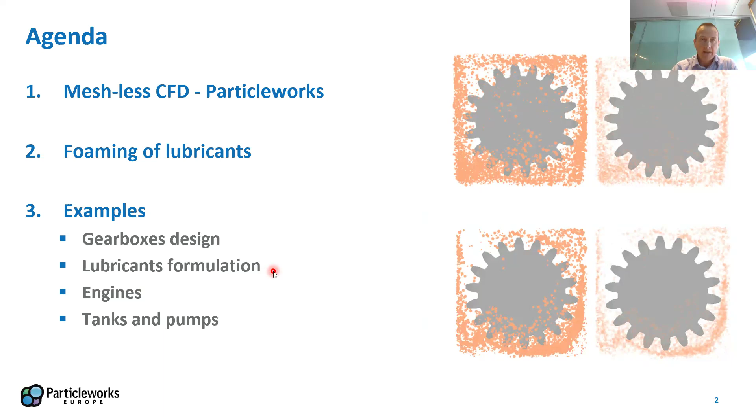Let's start from an introduction to Particleworks and meshless CFD. Particleworks is a meshless Navier-Stokes solver. Meshless in this case means that the fluid is discretized by particles instead of computational cells. So instead of using the classical grid that you probably know from finite volume CFD, we use particles, and each particle represents a certain volume of fluid.

The software can simulate single phase and multi-phase flow. Single phase means, for example, that we can simulate only the oil or lubricant or liquid phase in a gearbox, in a transmission system, in an electric motor, or for piston cooling, for example, you see here. We can also add the effect of air or gas flow on the liquid phase by multi-phase simulation.

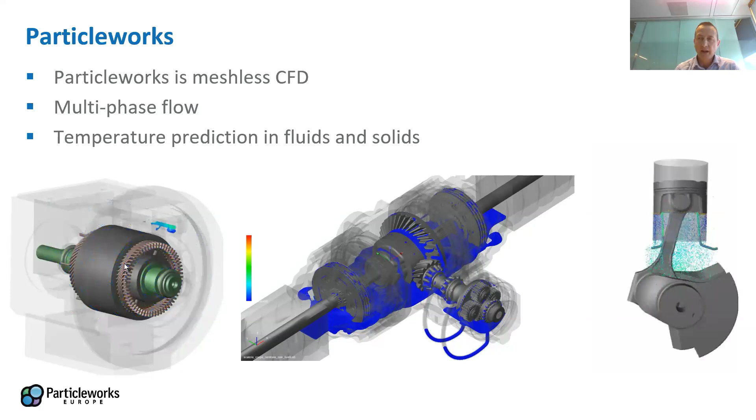So the software can simulate multi-phase, and it can also calculate temperature, both in fluids, so oil and gas, but also in solid bodies. For example, we can run a conjugate heat transfer simulation of the piston or of the windings and rotor of an electric motor. So Particleworks is not only meshless CFD, but it's also heat conduction and multi-phase flow.

Here you see an example of temperature prediction in the lubricant of a gearbox. You see the temperature evolving, so we can apply power sources associated to the gears, to the meshing of the gears, to the bearings. We can include the heating effect due to shear heating, and this produces heating of the oil, of the lubricant.

But also we can calculate in the same simulation with the same model the temperature of all the components of the gearbox, including the heat transfer between the solid bodies and the oil or gas phase, and the heat dissipation to the external environment on the external surfaces of the housing.

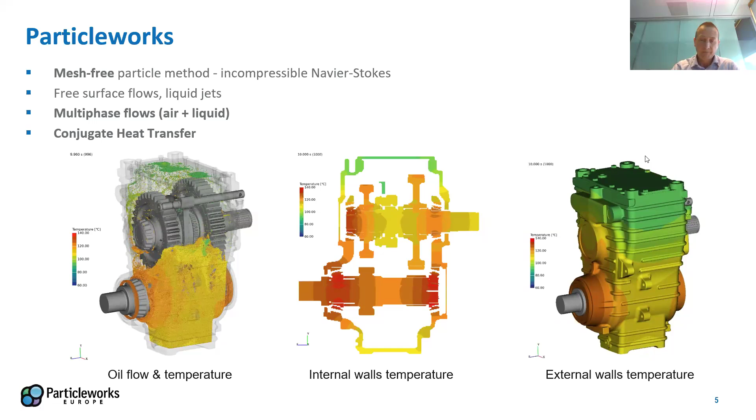The method on which Particleworks is based is called moving particle simulation. You are probably aware that there are different methods available. One of them is SPH. MPS, moving particle simulation, is quite similar to SPH, but not exactly the same for a number of mathematical reasons. The moving particle simulation was originally proposed by Professor Koshizuka from the University of Tokyo.

Together with other people from the University of Tokyo in Japan, Professor Koshizuka co-founded, almost 30 years ago, Prometech Software. Prometech Software is the company that develops the software Particleworks, and as you probably know, Particleworks Europe is the European office of Prometech.

Here is a parallel between the Eulerian approach that is typically applied by the finite volume method, so classical CFD, standard CFD based on an Eulerian approach. Let's say the drawback of the Eulerian approach, the mesh-based approach, is that first of all you have to generate the mesh, and this could be time-consuming and demanding depending on the geometrical complexity of the system. It becomes quite demanding and quite complex when you have moving parts.

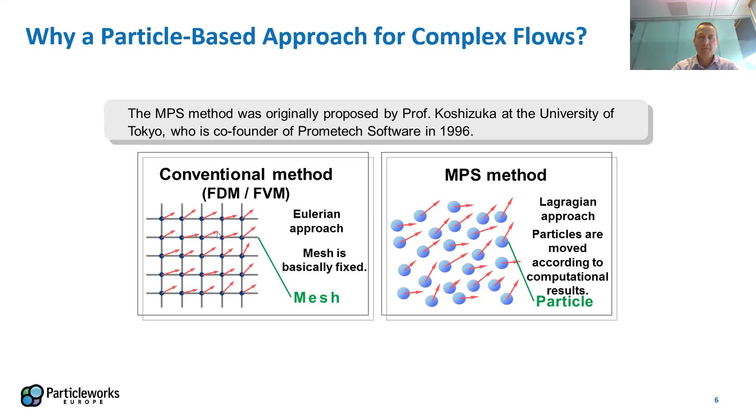So that's why meshless methods started to be developed by Professor Koshizuka and the University of Tokyo to try to simplify and to speed up the simulation process for powertrain applications. To show you a comparison and where the benefit is of using Particleworks and meshless CFD, here is a parallel between finite volume CFD and moving particle simulation. The two first steps of the simulation process, so the CAD cleanup, the fluid volume extraction, and the meshing part, are not needed for the moving particle simulation method in Particleworks.

What Particleworks does is to read the CAD, the 3D CAD, the solid bodies of the CAD, so the gears, the pistons, the casing, or the other components. So the CAD as is, you need to set up the fluid properties and boundary conditions, numerical settings, and then you start the simulation. So one big benefit is that you don't need to carry out these two steps. So this is a huge amount of time and man hours saved at the beginning of the process.

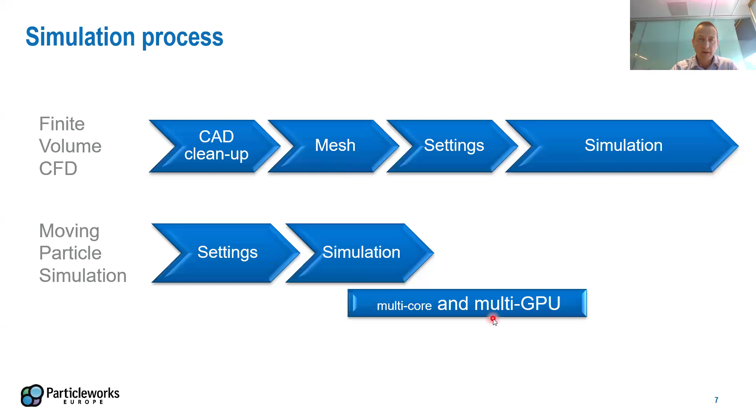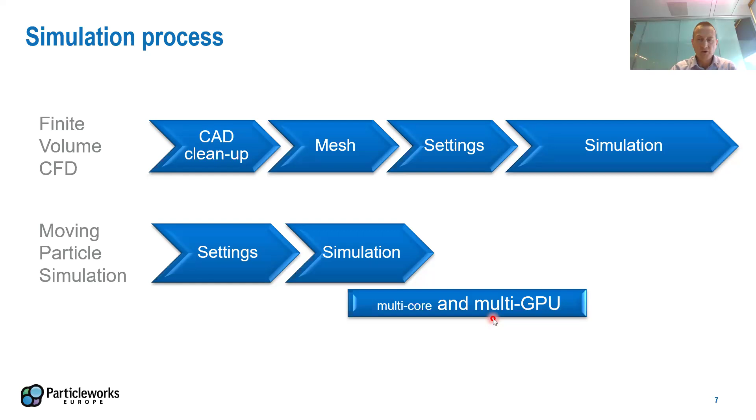And the second benefit is related to the GPU and multi-GPU capabilities of Particleworks. Particleworks was originally conceived to run on GPUs, and this makes the simulation extremely fast and also affordable, even without huge HPC clusters.

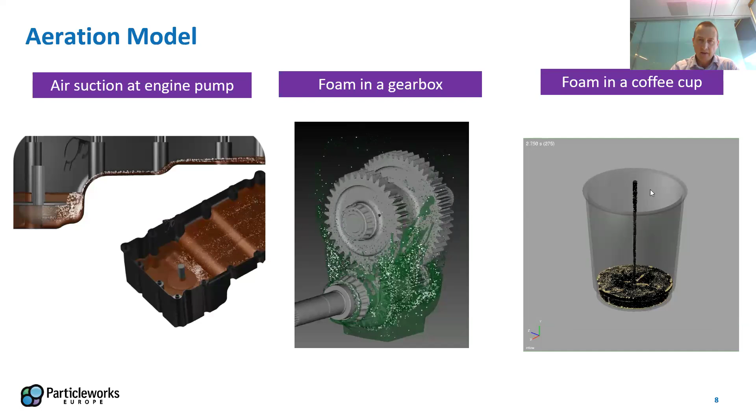So after this brief introduction about Particleworks and meshless CFD, I will give an introduction about foaming in lubrication, the drawbacks, the problems generated by foam, and then we will go into the examples and some industrial use cases, or at least some use cases that we built using demo models. So where does foam come from? Foam is actually already there. Air is already in every kind of liquid, water, lubricants, any kind of material contains air. Some estimates are that lubricants naturally contain from 6 to 12% air in volume. This is obviously not visible; depending on pressure and temperature, the rate could change.

And the problems start when the air is either released or when more air is entrained into the lubricant. Let's say that air can come out of solution, so it's originally dissolved, and it comes out due to pressure drops at high speed. This is basically phenomena associated to cavitation, high speed, and high pressure drops that might happen at pumps, flow restrictions, bearings in general when you have rotating parts at high speed. We will not talk about this kind of phenomena.

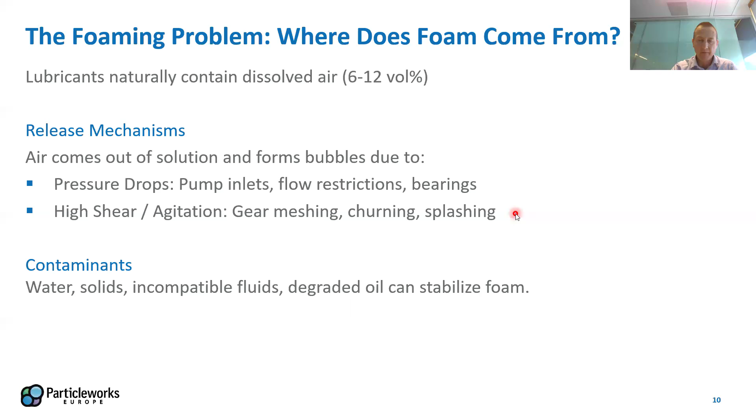To give you an idea of the costs of foaming, we mention here some of the problems related to the foaming effects. Oil aeration can produce a reduction in the hydraulic efficiency of pumps. It is estimated that a 2% air volume can produce a reduction up to 12% in the flow rate of a pump.

Reduction of heat transfer, so cooling efficiency. Tests with mechanically aerated oil show that the heat transfer coefficient can reduce up to 50% with respect to degassed oil, so clean oil. Obviously, gearbox losses, power losses associated to the oil splash. This is obviously one part of the losses of the gearbox, but the comparison between clean oil and oil with foam shows a difference of up to 30% due to the foam, and the same can be shown for bearings.

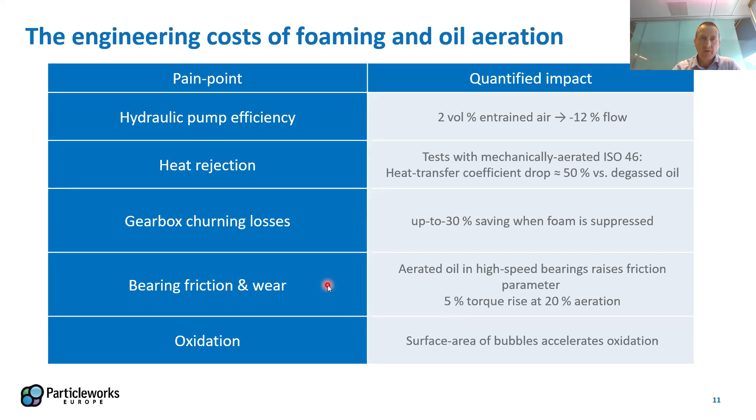So the aeration of oil and lubricants can increase by 5% the total losses of bearings and similar systems due to aeration. And finally, this is a chemical process, oxidation. The oxygen inside the air can produce oxidation and degradation of the lubricant quality over time. So faster oxidation of the fluid. These are some of the problems.

And this is what Particleworks can do. Obviously, Particleworks cannot simulate all the phenomena I mentioned. It cannot simulate any chemical phenomena. What Particleworks can do is to simulate physical, mechanical phenomena associated to the oil-air interaction, to the air entrainment by the oil due to mainly two phenomena. The first one is the bubble generation by the interaction of the lubricant free surface with moving parts. So when a gear rotates and breaks the oil free surface, it entrains air and bubbles are generated. Bubbles are entrained, generated, and then they follow a certain path and lifetime.

The second kind of phenomena that can be simulated by Particleworks, by CFD, is the bubble generation by liquid-liquid interaction. So when the free surface interacts with falling droplets, with oil jets, the phenomenon is similar to the first one. There is air entrainment and bubble generation.

So the aeration model available in Particleworks includes these two phenomena, and the outputs from the simulation are the amount of foam inside the lubricant, the growth rate of foaming as a sort of ramp up, and then it tends to stabilize to a certain air volume fraction in the oil. The software can estimate the growth rate and the final volume fraction, transportation, bubble transportation,

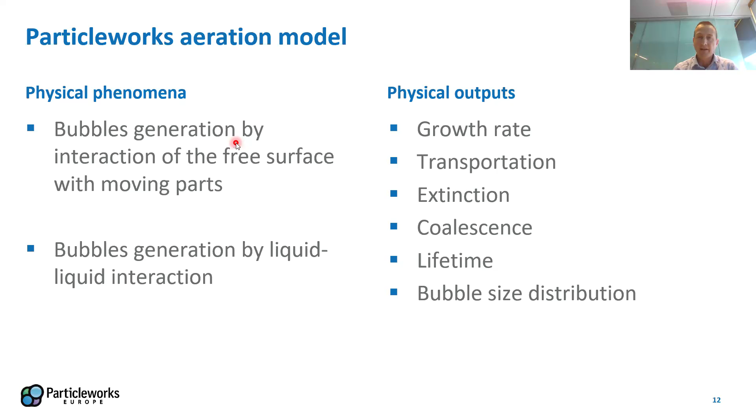The aeration model that is available in Particleworks was developed by Prometech together with Honda. There's a public interview available with the Honda R&D engineers showing how the development and the cooperation between Honda and Prometech worked. What they basically did was to start from a problem from Honda related to the excess of bubbles in an engine, and using real life and experimental data from Honda, Prometech developed a model that was able to predict the foam generation and bubble size distribution, and this model was validated against the available experimental data.

The final aim of this model was to have a model that could be used practically in everyday engineering design life to optimize the hardware, to optimize the engine channels, the sump depth, the gear shield, or other kinds of devices to minimize foaming without using physical prototypes. So the aim, as usual, is to reduce the number and the cost associated to prototypes and physical testing, and substitute physical testing with simulation and virtual testing.

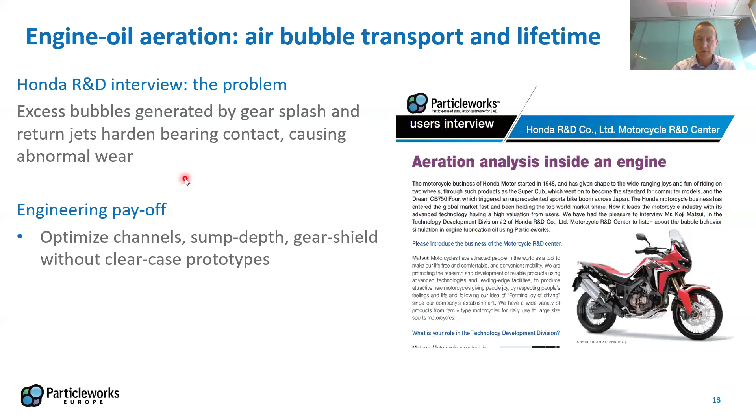The model was developed. Now, I don't want to enter into the details, but just to give you an idea of how the model was developed and validated. The engine was... a clear case was built.

Using this clear engine, it was possible to visualize and measure by means of high-speed camera the foaming level, the bubble size distribution in different parts of the engine, and using different kinds of layouts to extract the lubricant and to measure the foam level and foam bubble size distribution after some time.

So there was the original engine, there was a gutter to extract part of the oil, and then there was a separate tank to let the foam stabilize and to measure the amount of foam and its distribution. Here you see some details from the findings, mainly related to the different areas and to the bubble size in the different areas.

So it was possible to understand that the peak density of the bubble size spectrum was at 0.5 millimeter. It was possible to identify fine bubbles with a particle size lower than 0.3 millimeters everywhere in the circuit, in the oil circulation circuit. And it was also possible to identify, let's say, the maximum bubble size in the range of 2 millimeters. So no bubbles with a diameter higher than 2 millimeters could enter the pump.

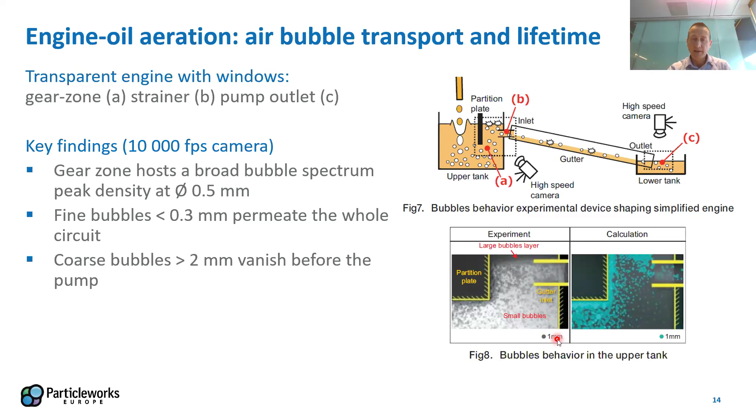And here you see visual comparison between experimental data and simulation from Particleworks, where you see the particle size in the range of 1 millimeter, bubble size in the range of 1 millimeter. The validation was done not only on the amount of oil, but also, as I said, on the bubble diameter. So this is the, let's say, the lifetime, and this is the bubble diameter.

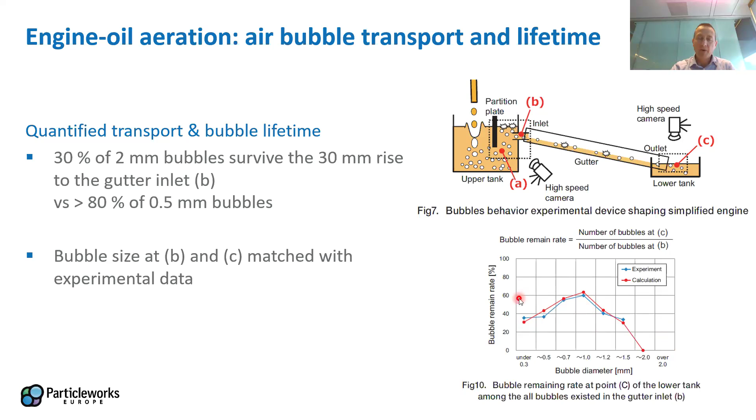And you see, for example, that there are no bubbles with a diameter higher than 2 millimeter, and you sort of see the particle size distribution or bubble size distribution in comparison with the lifetime of the bubbles, where you see a peak around 1 millimeter. So this means that, for example, the software can predict both the distribution and how long the bubbles will survive in the system.

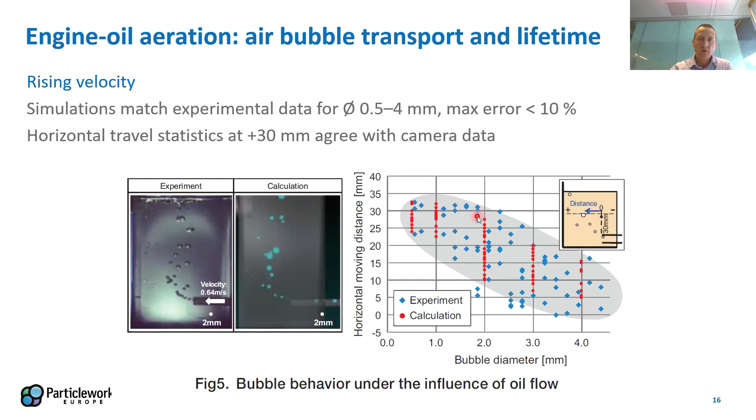And you can notice that the red points that are the calculation results are in the same cloud of points coming from the experimental measurements. So after validating, the model has been applied to real designs of the engine to design the engine so that the foaming amount could be minimized.

I want to give you some examples related to a gearbox, again to show what the software can do in terms of geometry comparison. When it comes to foaming, foaming is, as we said, related both to physical phenomena, air entrainment due to mechanical effects, but is also related to chemical phenomena.

In this example, what we did was to simulate a specific type of lubricant. So let's say we keep the physical properties and the chemical properties of the oil as given. We don't want to compare different lubricants. We just want to compare different designs, different operating conditions of gears. The gearbox is obviously not a real one. It's a very simple one. We cannot show real data. We have some at the end.

But the idea is that in this example, we compare different rotational speed and different directions. The gears are rotating in the same direction in these two cases on the right-hand side, and are rotating in opposite direction on the left and top of this video. Here you see in pink, these are the air bubbles. We don't show the oil, otherwise nothing will be visible.

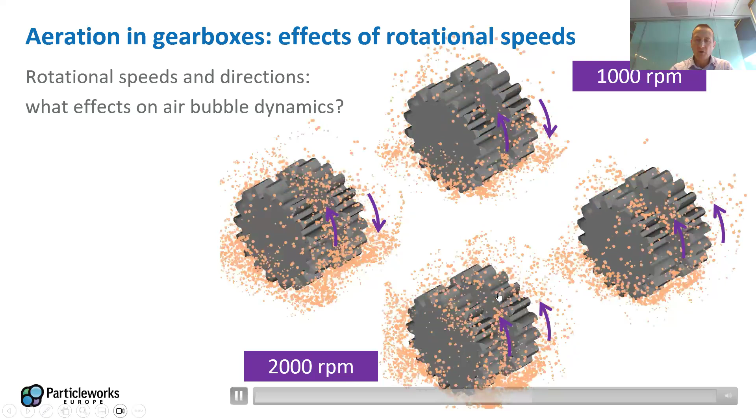This is a comparison of the different conditions and different designs or different rotational directions. You can notice that the amount of air entrained and the history, how the growth rate of the foaming is different depending on the speed and depending on the direction of rotation.

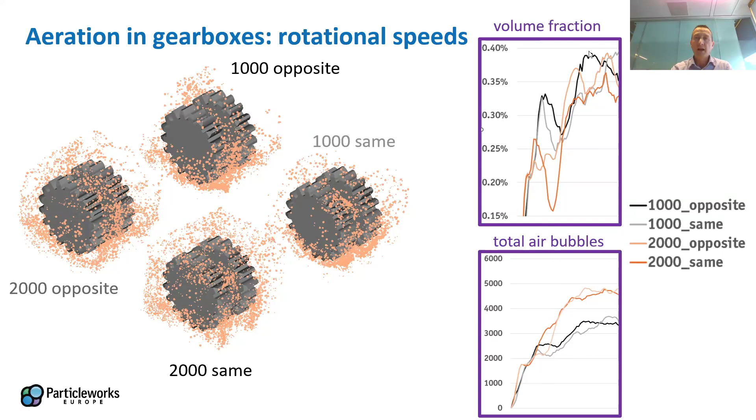And after a certain period of time, we can also evaluate the total. In this case, we are showing the total number of air bubbles. This can be translated into air volume or air volume fraction as shown above. Obviously, the particle size can affect the translation of the total air bubbles in terms of numbers into the volume fraction. So both effects, number of bubbles and particle size distribution, are accounted for.

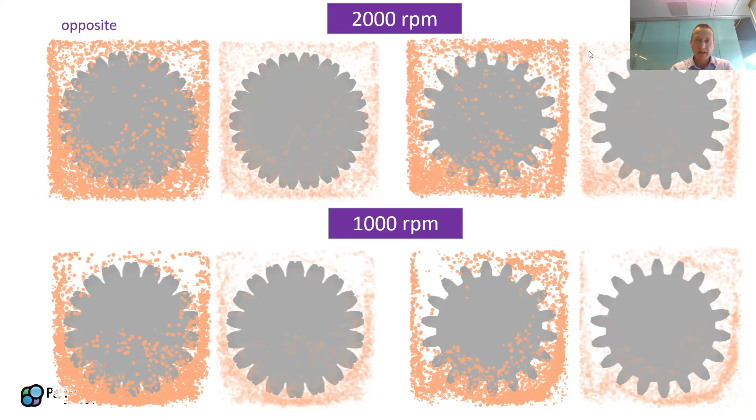And here you see the same. So we can have a visual comparison of the air generation. We can detect where the foam is generated. We can calculate the bubble transportation to understand where the foam goes and where the oil is more, let's say, contaminated by the foam.

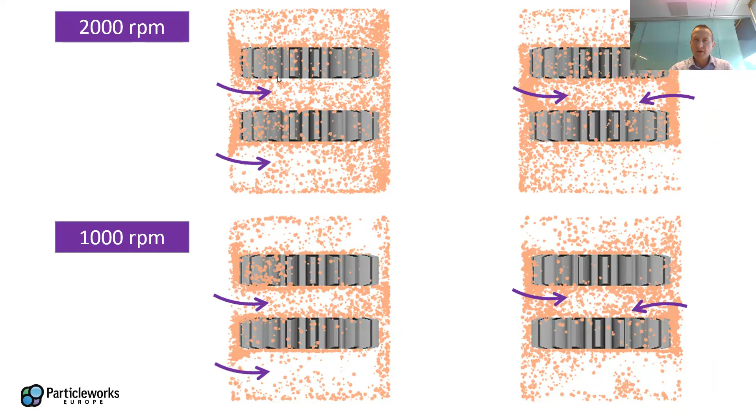This is a top view of the same example. So, for example, at higher speed, you can visually already see that there is a higher amount of air entrained, and so higher oil foaming. And it seems that when the two gears rotate in the same direction, again, you have a higher amount of foam generated.

Now, the message from this first example, that was a very simple example because we cannot show a real gearbox simulation, is that the software can predict and compare different designs and different operating conditions. The software can also compare different lubricants. In order to compare different lubricants, obviously, we have to account in some way for the chemical properties of the lubricant.

This cannot be done by CFD in general, because when you define a fluid in CFD, what you give is the density, the thermal properties, the surface tension coefficient, viscosity, and contact angle. So you don't have any input related to the presence of specific chemicals to reduce foaming or other kinds of chemical properties.

So what we investigated was done together with TotalEnergies, that is a well-known oil and gas and lubricant company. We did a project together with Total to investigate the effect of anti-foaming agents in oil, and we compared different kinds of lubricants in terms of tendency to produce or to reduce foam generation.

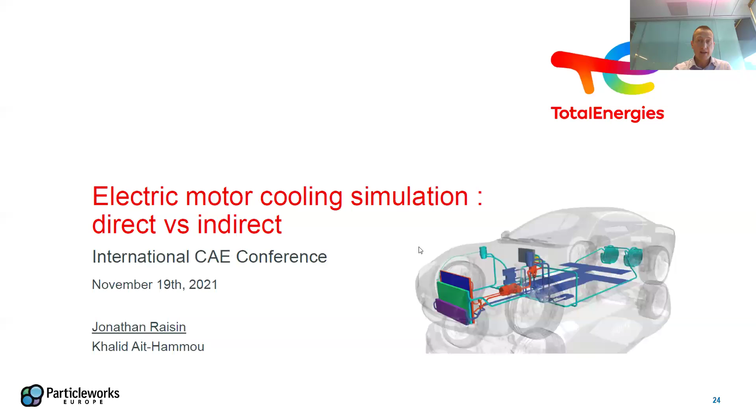The cooperation with TotalEnergies dates back to 2019, and what you see here is another paper that was presented by TotalEnergies in our conference in 2021. This is related to electric motor cooling simulation, so a totally different topic, but this is just to tell you that Particleworks and Total cooperated on different topics related to lubricant foaming, lubrication of gearboxes, and also cooling of electric motors to support the development of new fluids.

What we did together with Total was a two-step process. The first step was to simulate a very simple single gear gearbox that you see here, and we simulated different levels of RPM, low, medium, high RPM, to tune our foaming model for different kinds of fluids.

So starting from available experimental data from the TotalEnergies laboratory, what we did was to tune the parameters of the foaming model to be able to capture the bubble size distribution and the foam volume fraction in the oil for different kinds of lubricants. Starting from the available data, we were able to validate for one RPM and then to verify the consistency of the model for different RPM.

And the model, after the original validation on one RPM, was able to show good accuracy also for lower and higher RPM. Here you see, for example, the visual effects in terms of height of the foam layer, and you cannot see the bubble size distribution. This is something that we will share with the complete and full paper in October.

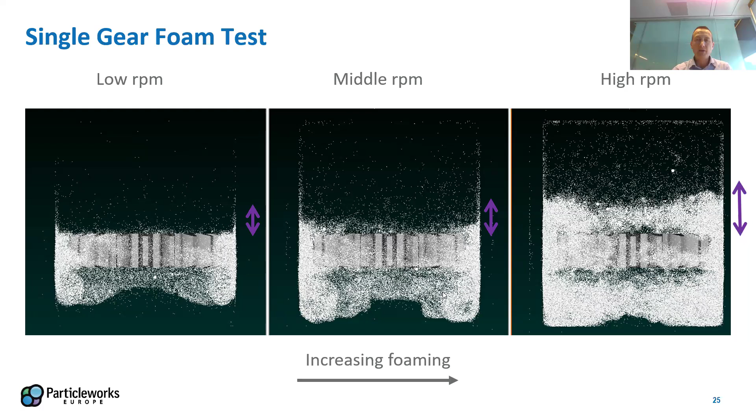After the initial validation of the model, based on a single gear and based on different lubricants, we started using a more complex, a standard, but a more complex gearbox with the 2 gears to start simulating real conditions. Again, we used the same hardware, 2 kinds of lubricants, different lubricants, and we simulated a wide range of RPMs to again compare the different lubricants and to compare the effects of different RPM.

The hardware, so the gearbox, was the same. So in that case, the 2 parameters were the effect of the rotational speed and the effect of the lubricant. And the software was able to show the same trend between the two lubricants. So lubricant A compared with lubricant B, we had not only the same trend, but also the same amount of foam, the same ratio between the two lubricants that was measured at the test bench.

So starting from the original validation, we were able to extrapolate and use the model for other cases, for real hardware and for real operating conditions at different RPMs. Here you see the video where you see not only the foam generation, but also the foam distribution and transportation. And again, all the results will be available soon.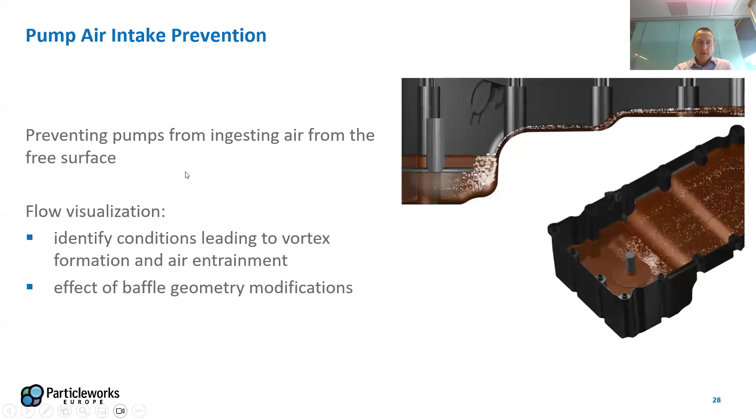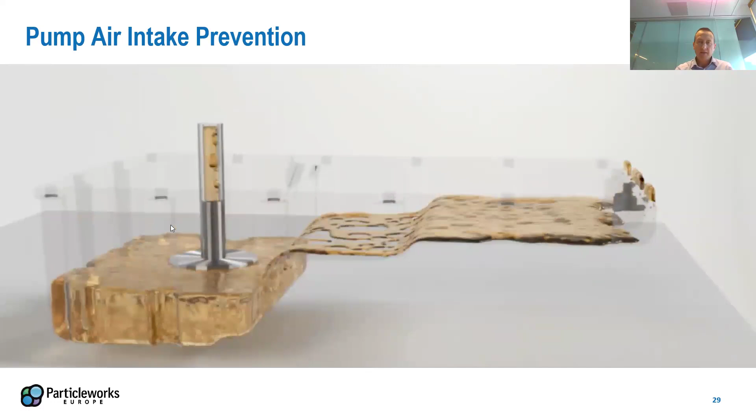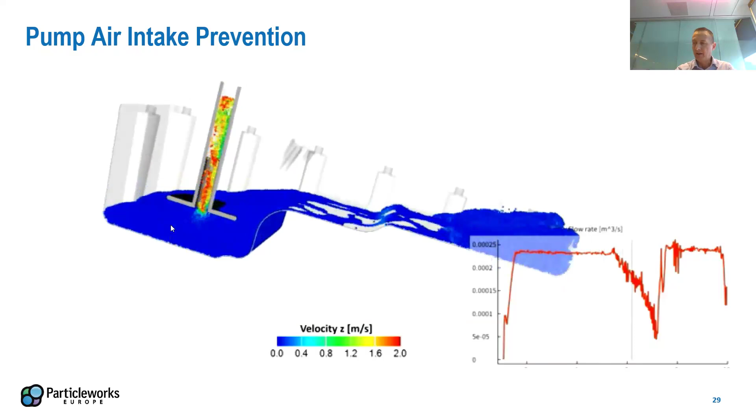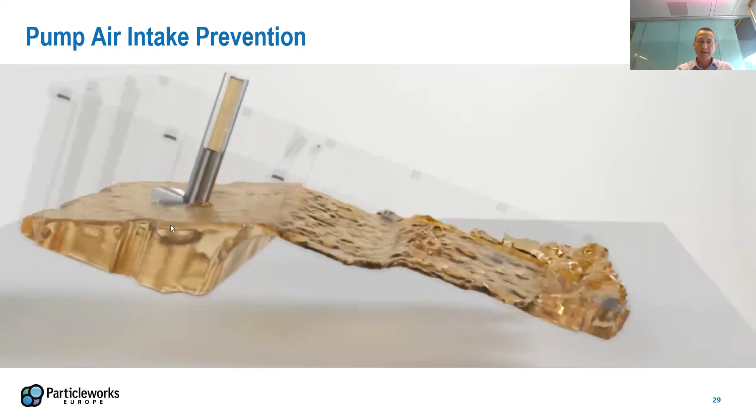The same model can be used in static and dynamic conditions. So not only bubble generation due to the air entrainment, starting from clean and pure oil, but also air entrainment associated with dynamic condition. So in this case, the problem is not only related to the presence of bubbles in the lubricant, but also to the reduction of the oil level at the pump due to the tilting of the engine. Both phenomena can be included in the same simulation.

Conclusions. As we said, lubrication and cooling associated to gearboxes, electric motors, pistons, engine sump can be affected by foaming. Foaming has different effects in terms of efficiency, increase of power losses, reduction of performances of pumps and gearboxes, and also in terms of reliability and life of engines and gearboxes, especially at high speed, when the mechanical effects of air entrainment, but also of cavitation and air release from the oil can be relevant.

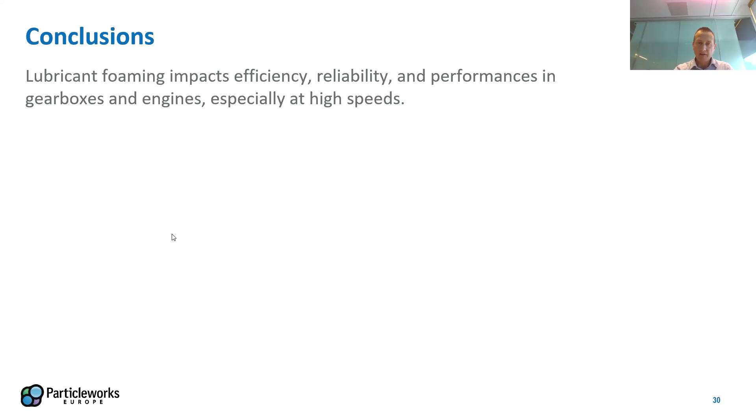Particleworks and Prometech developed a specific model to be able to predict at least the mechanical phenomena that produce air entrainment and foam generation in lubricants. This kind of model is available from the standard Particleworks software. It can benefit from the meshless CFD methodology. It can benefit from GPU acceleration to speed up the simulation process. What the software can calculate is bubble generation, transportation, lifetime, and foam characteristics, mainly bubble size distribution and volume fraction.

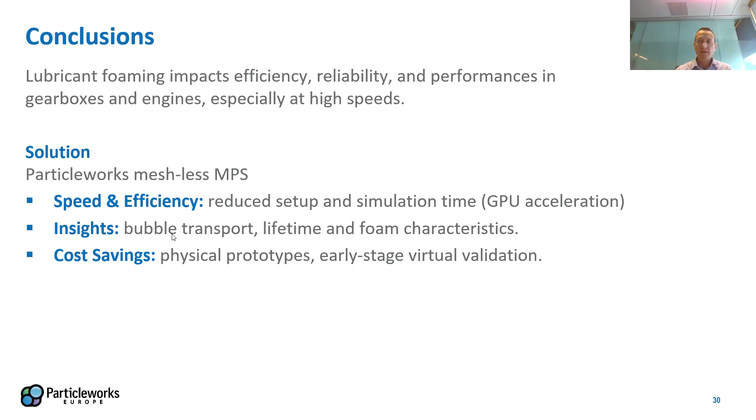The software can be used also to compare different lubricants. In this case, since the software cannot account for the chemical effects, a tuning of the model for the specific lubricant must be done. So experimental data are needed to characterize the lubricant, but this is only needed when you need to compare different lubricants. This is not needed when you want to compare different operating conditions or different hardware, different designs.

And this is the main use of the software and model, to be able to analyze different designs virtually, optimize the system and the design to minimize foaming, and so minimize the drawbacks of foaming. And at the end of the day, to produce reliable and more efficient gearboxes and engines.